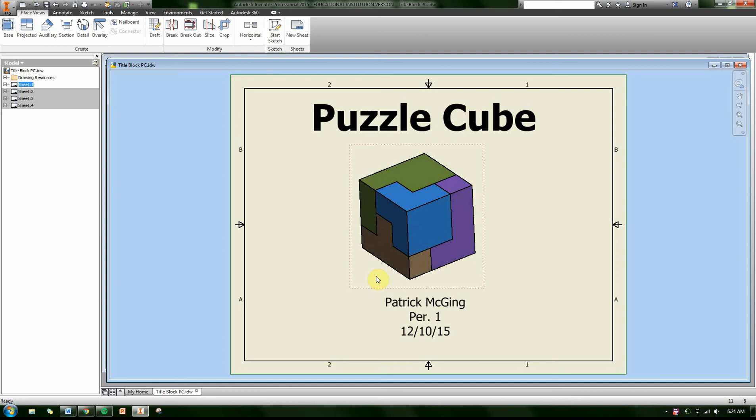Alright, the next two things I'm going to show you are going to be how to create your assembly sheet and exploded view sheet with parts list and balloons. So from here, again, as always, new sheet. I'm going to start with the assembly, but the name of the project is Puzzle Cube. Part name is assembly.

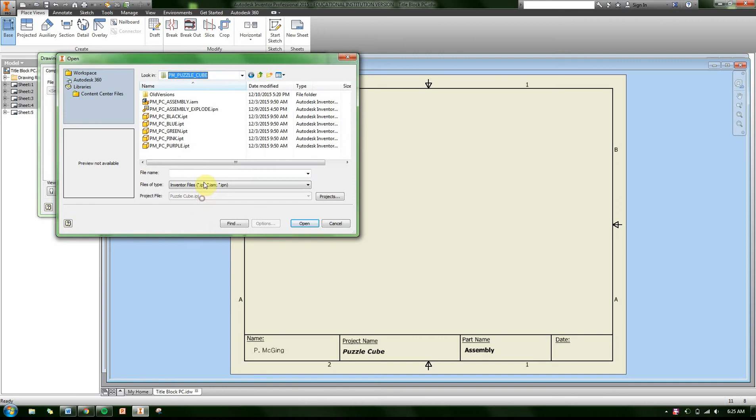And I'm going to place my base view, find my IAM, and in my case, if I go to my front view, you can notice that it is not aligned correctly, so I'm going to make a custom view. So right here is change view orientation, and you could use this, but most of you probably will not have to. But I'm going to use my look at feature here, select this front view.

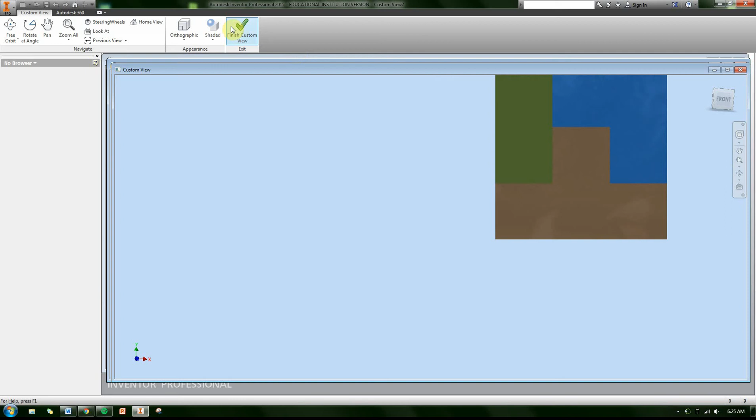Now it actually is aligned correctly, and when I go to place my front view, it is aligned correctly on the sheet. Now you'll notice that it's also very large. I don't need it this size. I am able to scale it down right over here on my edit view option, and 1/2 works really well. So as always, I'm going to place my front, top, right, and then bottom and left view.

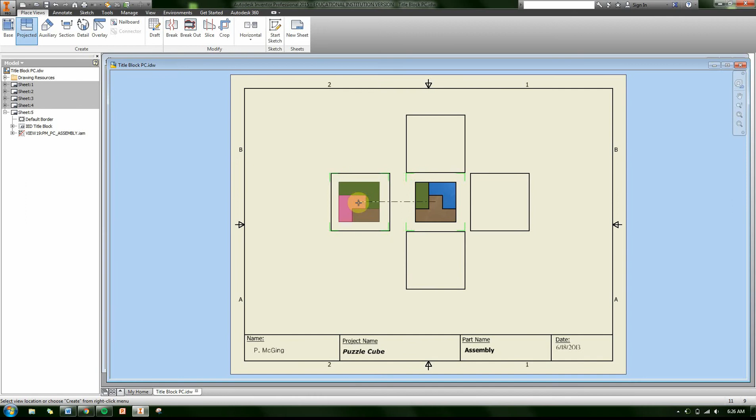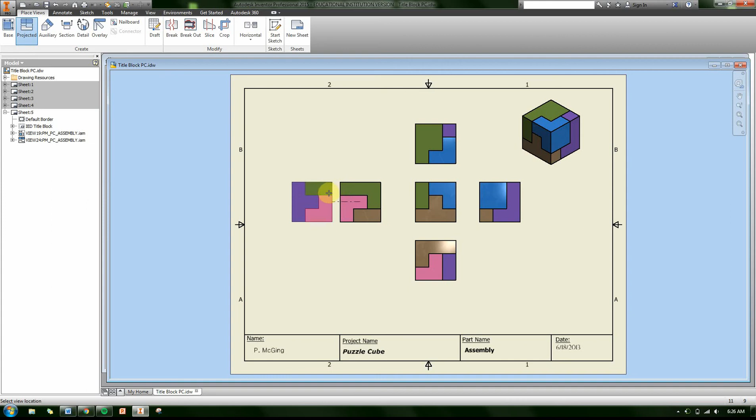If I try to place my backside view, you can see it's exactly the same as my left, so I'm going to do a different step there. But I'm going to place my isometric as well. Create. There are those 6 views, and then to place my backside, I have to go to projected, select my left side view, and then I can place that backside view like so. And there are the views that you need.

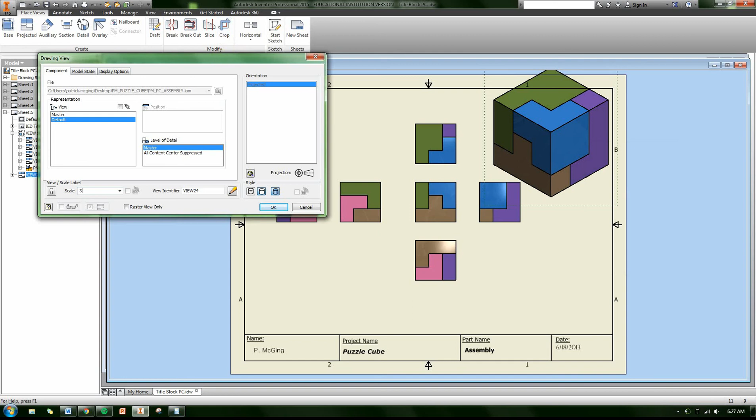You can scale this larger if you'd like. I'm not requiring it, but 1-to-1, if you do that, you will need to move your views around a little bit to make it fit. Otherwise 3/4 works out really well, and you don't need to do much shifting of views for that. That's it. It's a very simple sheet to set up.

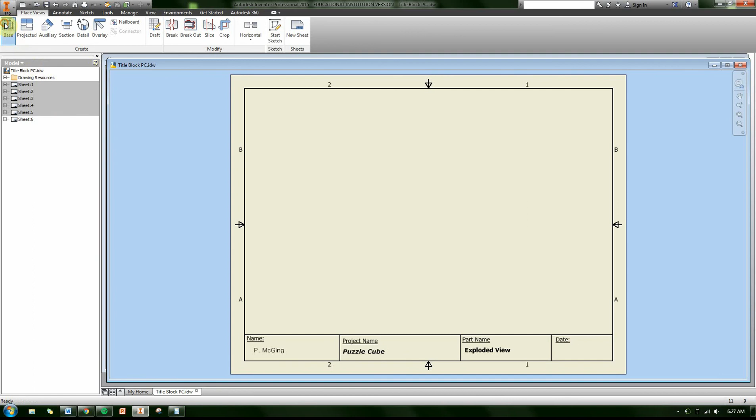So after that, you go to new sheet again, and this will be your exploded view. And again, base view. In this case, instead of my IAM, I'm going to find my IPN. And your ISOs work out really well for this, your different ISO views, so find one that works well for you. The ISO top right will probably be your best bet.

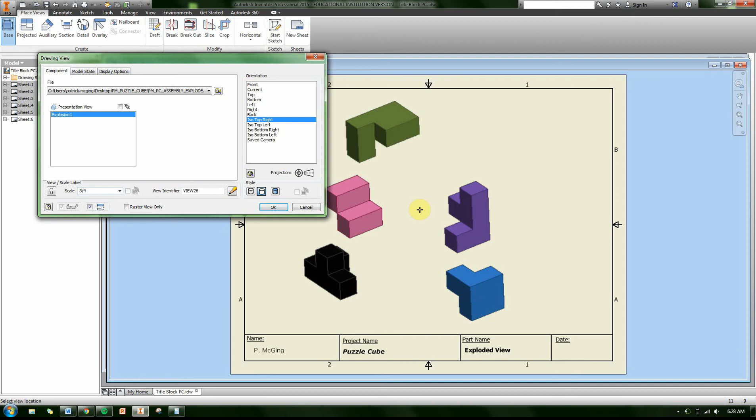And again, 3/4 scale works probably the best for this. 1/2, some of you might need to do that depending on how far you spaced your pieces out. But I'm going to place those towards the left hand side here. And you are going to want to shade these. From here, on the Annotate tab is Parts List, and once you do that, you may have to select your exploded view. In my case, it did automatically select it, so I can just hit OK.

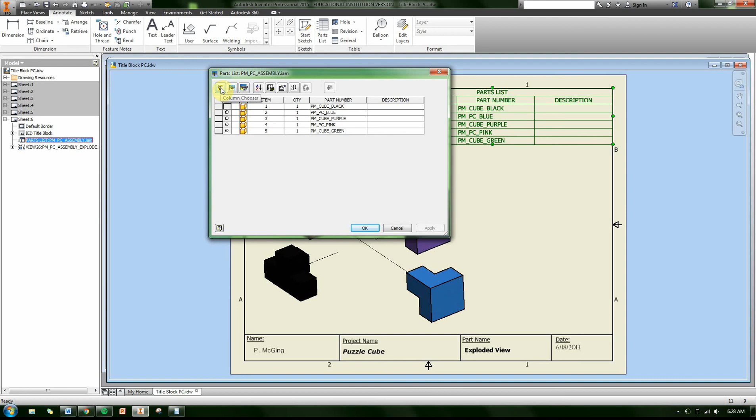I would like you to snap it to one of the corners. Does not matter what corner, but just snap it to a corner, and you can see it's highlighted in red if you hover over it. When it is that, just double click, and you want to go to column chooser, which is the very far left option, and you can remove and add items. So there's a lot of different items you can add.

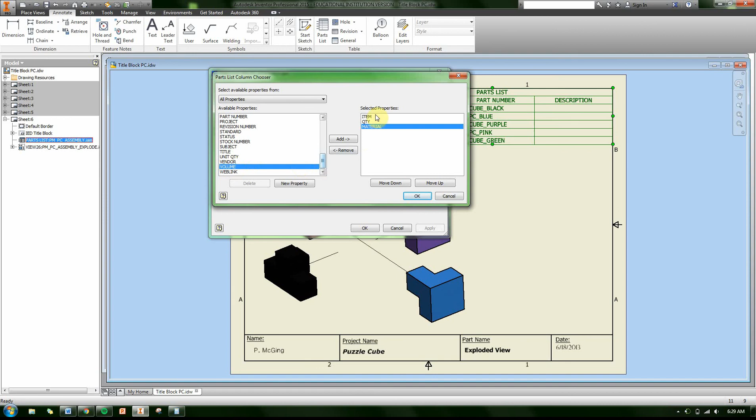The ones I would like to see are item, quantity, material. If you'd like to add something else in, go ahead. Part number is usually one that students add. Volume as well, but just those 3. If I hit OK, again, you can see now there's my completed parts list.

That has my material, which is wood. It should not say generic. It should say the type of wood that you use when you made your parts, so you may have to go back and change that. Then I just need to add in my balloons, and for those, you just click balloon right here again on the Annotate tab, select a part, click on the part, click once again, right click continue, and you want to do that for each one.

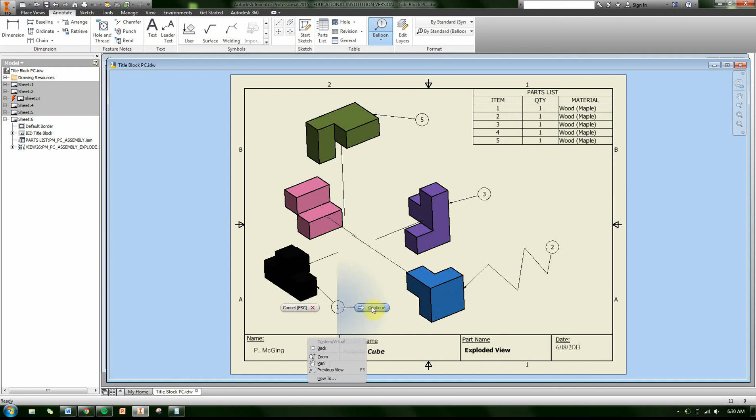You can click multiple times, but please don't do that. Notice that my leader lines are not cutting through my part either. And that's it. Once you have that, you have all of your views done, and you can print everything out.